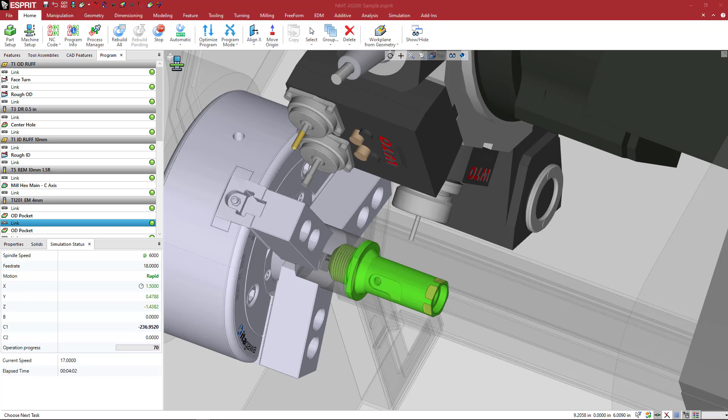ESPRIT's digital twin is a game changer to feed optimized programs to your machine. In this tutorial, we will show you how to build a lathe chuck body and jaw models to take your programming to the next level, identifying program changes upstream of the machine. So let's get started. The first thing we want to check is whether the solid model is positioned and oriented correctly.

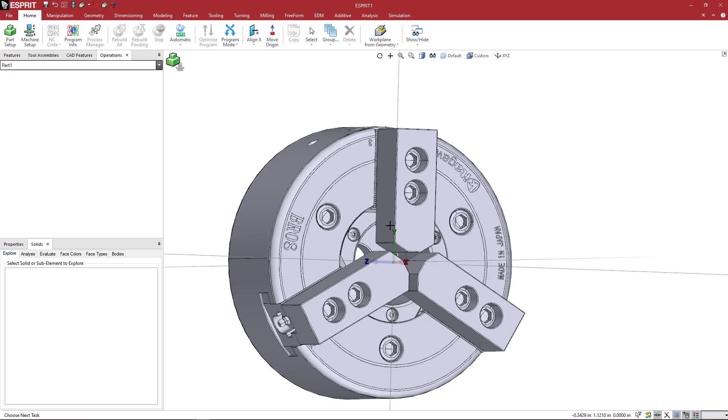This is a Kitagawa chuck, their BR08 that you can download from their website. If you want to follow along, you can go to the Kitagawa website and grab this one. This one is the BR08_OC.

So we first want to orient this. We notice that the face of the chuck is oriented along X. We want that to be along Z. And while I'm doing this, I'm just going to set my 0 point to where this would mount.

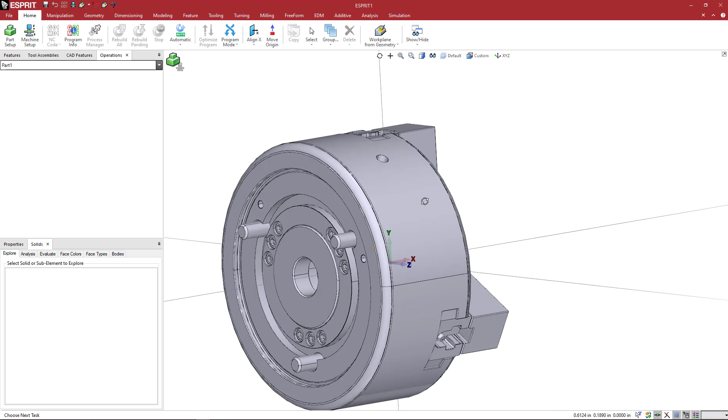So these are the mounting screws. I'm going to pick this back face here, and make sure just to highlight that face. When you start ESPRIT, you can do that, but you can also switch your filter so you can click away here, not on one of these icons, but in the square where it says bodies, and then pick face. That way only faces will be picked, so you don't have to do as much highlight mode stuff.

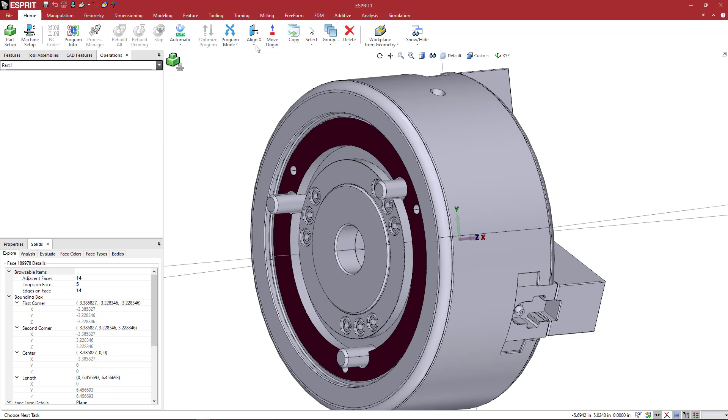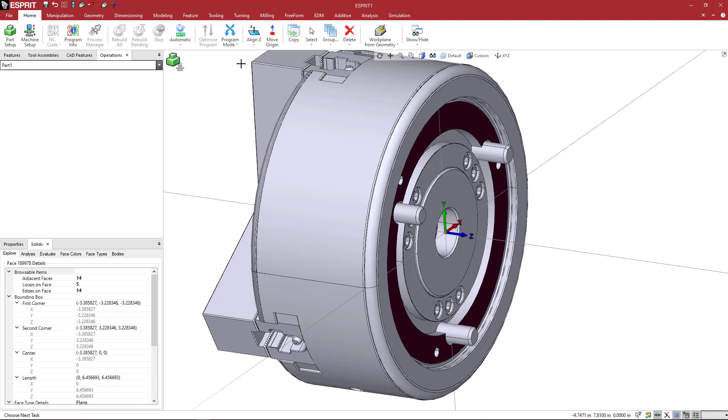So what you could do is pick this mounting face, and what we're going to do here is come to the home ribbon, over to the align commands, and pick align Z. You'll notice that the align Z command will align that face so it's normal to the Z axis, but we want the opposite result. So activate this command while holding the shift key. We're going to hold shift and pick align Z, and we see that the Z axis is now normal, but going in toward the face we selected. That looks pretty good.

So you can basically use that command either way, but we want the Z-axis coming off of the machine, basically into the lathe chuck.

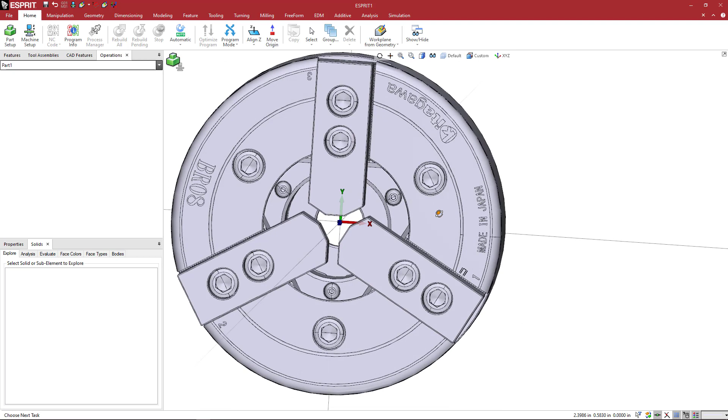So looking at the jaws, in my head I like to have one of the jaws aligned along the X. Looking at this, I'm just going to assume that this is aligned along the Y, so I want to rotate this about the Z-axis here, minus 90 degrees, even with the X-axis.

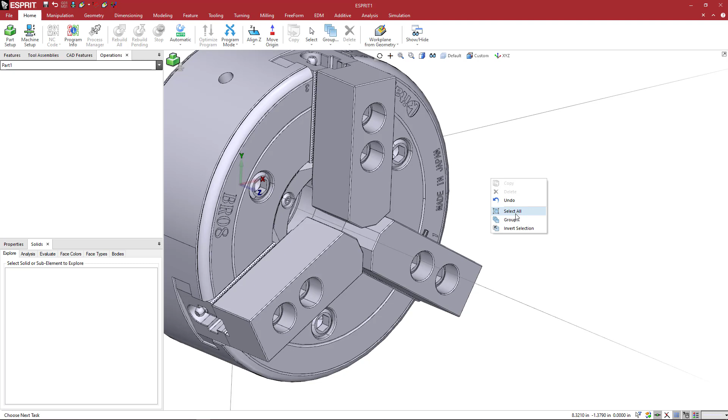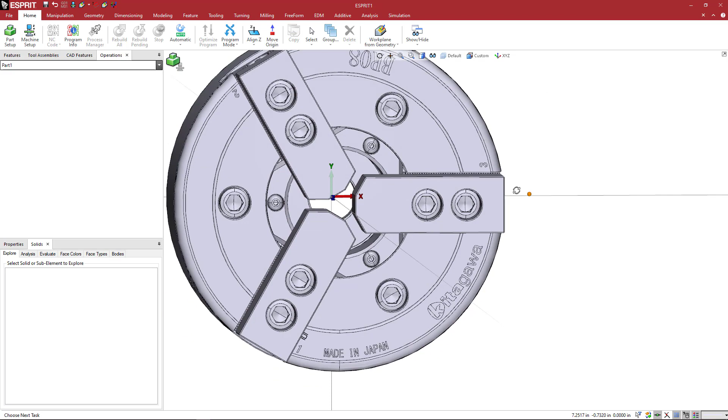So I'm going to hit Control-A on my keyboard, or you can right-click, select all, then right-click again and say copy, and say rotate. We're going to say move minus 90, and using the origin is fine. Once you hit enter, the solid assembly for the chuck will rotate, and you should have this jaw even with the X-axis.

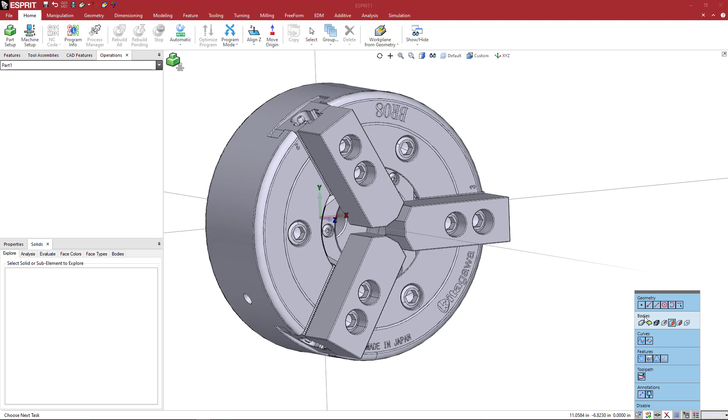So now let's take a look at the solid itself. Now that we've oriented and positioned everything the way we want, I need to turn my selection filter off, so I'll just turn on the bodies. Now I can pick faces or bodies, and I see we've got some individual solids here, which is good. We want to have these jaws separate. I've seen some where they're all in one, so you have to do some CAD work.

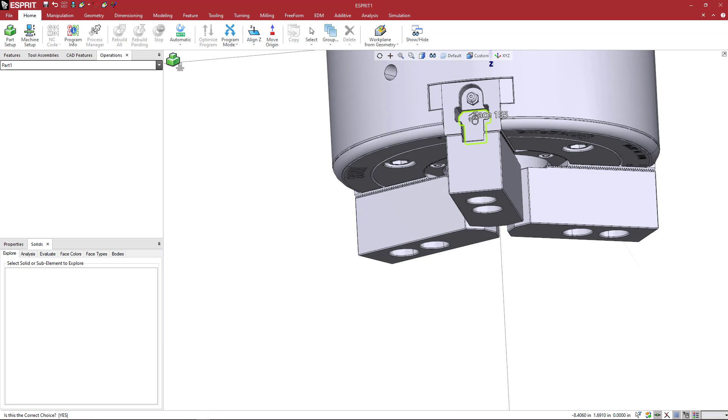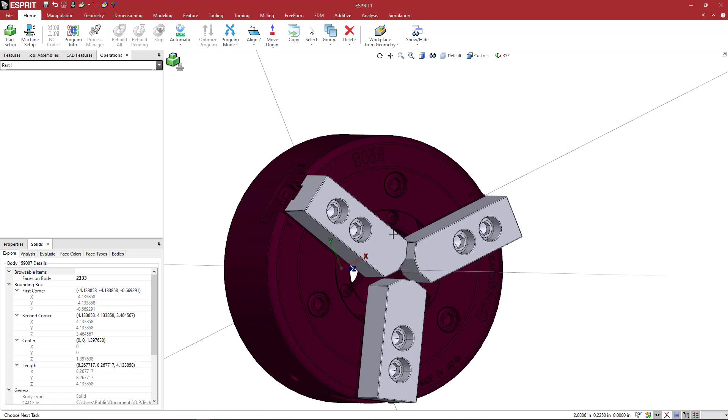So we see that the screws and all the stuff for the jaw assembly is separate, which is good. And then the chuck body looks like everything is in one piece. This is a BR08, and per their website, it's got a center bore which allows bar stock to slide through. I can see they have this component that bolts onto the back, so we're going to want to do a little bit of CAD work with this.

So, okay, what do we want to do next? What I'm going to do here is go to F4, which gives me the view that is the lathe view. And I'm going to create a new layer called jaws, or jaw, whatever.

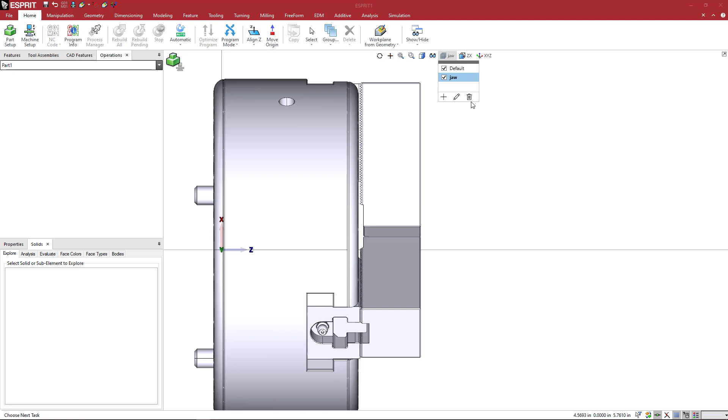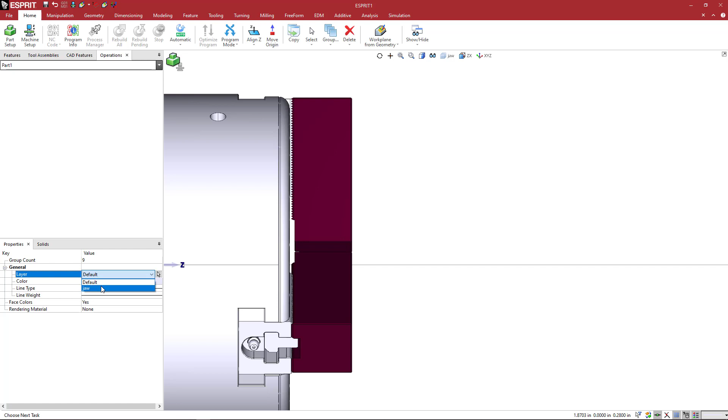So what I want to do now is turn off... I'm going to go back to the F4 view here, and window in on these front jaws, then come to the properties and turn this to the jaw layer. When I do that, we turn this off, and we now have these three base units for the jaw assembly here, in addition to the chuck body that's visible. These I don't really need anymore, so I'm just going to delete them.

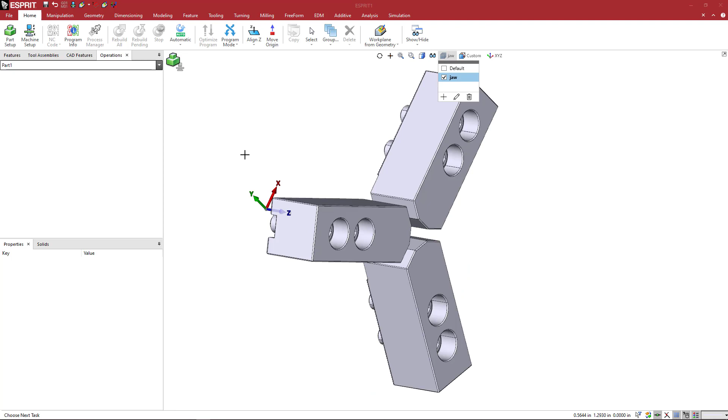Get rid of those two, and we don't need any of this stuff either, because basically we're going to make a jaw assembly that will automatically be loaded onto the chuck jaw.

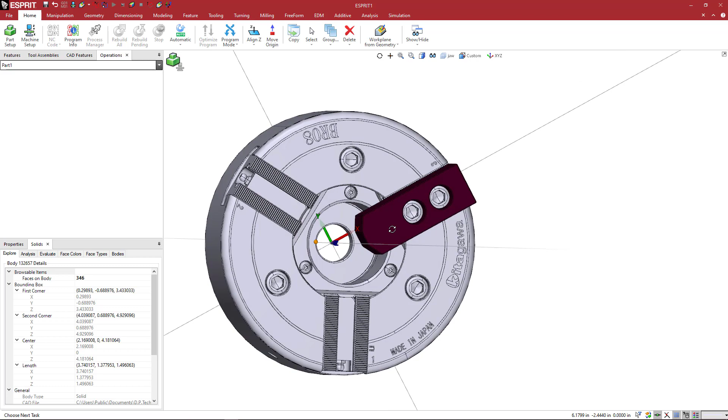One other consideration is going to be the positioning of the jaw itself. We want this jaw to be in the open position. When I look in the manual for this chuck body, they say that this T-slot nut here should not protrude in operation beyond this face here.

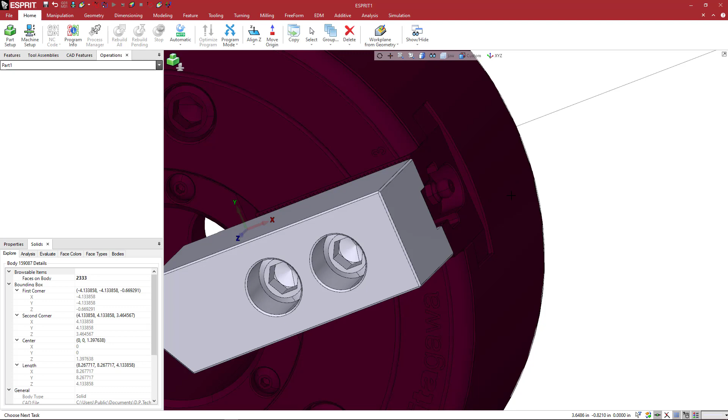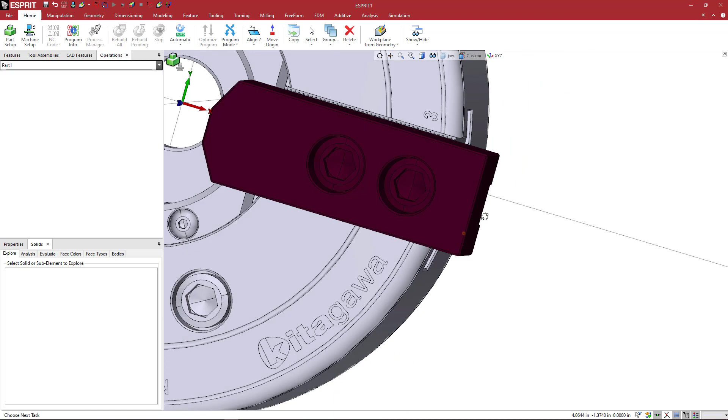So what we're going to do is just highlight this chuck body and hit Control W on the keyboard. Remember, this is already aligned along X. I could just right-click, copy, translate, and along X, I'm just going to say 0.6. That moves this jaw assembly so that it's slightly beyond, which, when you have material in here in the ESPRIT simulation, the jaws are just going to automatically close up to the diameter of your workpiece.

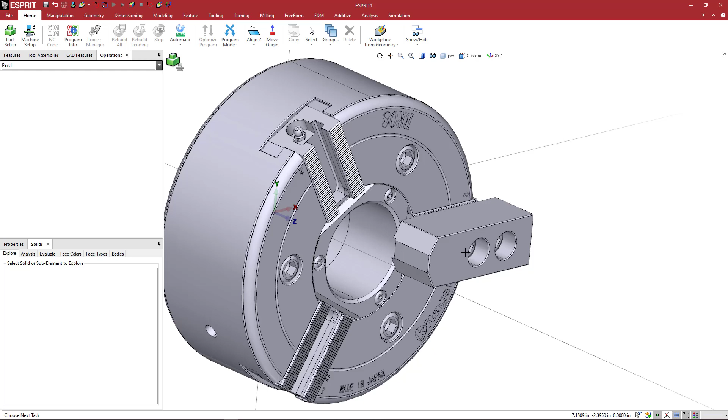Once we've positioned that, then we're good to go. I always like to put things a little bit further than the normal range. Now, ESPRIT will, if you have a workpiece that can't be positioned in your existing jaw because there's not enough stroke or something, it will let you know. So it's up to you on how accurate you want to place that. But let's go ahead and continue.

Let's do a couple things first. I'm going to turn my jaw layer off again, and we'll go back to activate. Double click on default, make sure default is active. What I want to do here is get rid of this center portion so that if we had bar stock sliding through, we don't have any chance for a collision in the ESPRIT simulation.

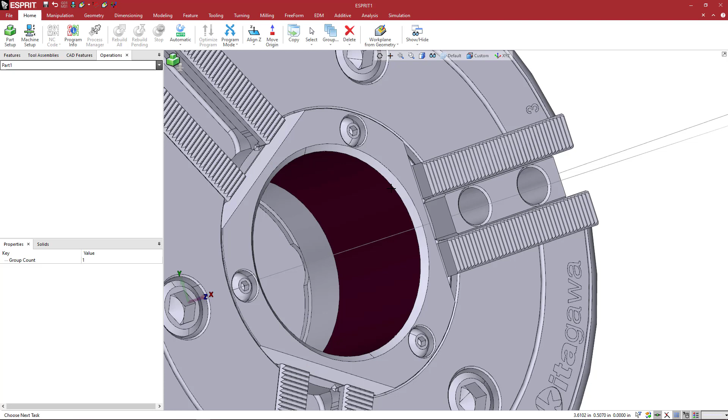So what I'm going to do here is pick this. I'm going to go down here to select filter, and I'm just going to basically click on the box and enable everything. So I'm going to pick this edge, and I'm going to right click and say copy, and we're going to say smash, and make sure your wireframe is checked.

Then what I want to do with this arc is I'm going to come up here to geometry, keep, and I'm going to hold my shift key down. You want to hold shift down, and that is going to basically unbound your arc into a full circle.

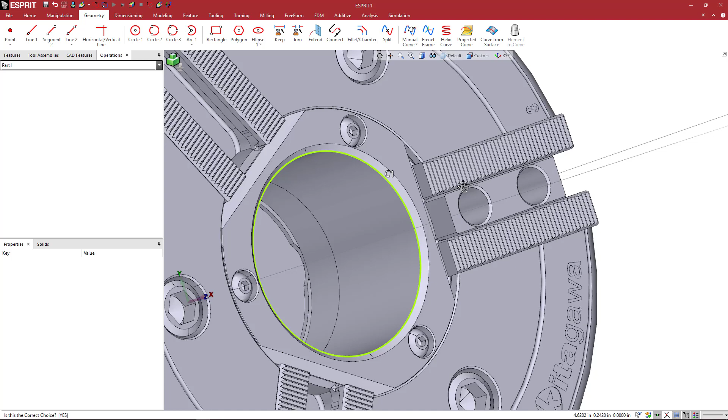Once I've done that, you could go ahead and hit the escape key, get out of that command, and then pick your circle. If you're still active in one of these modes, it shouldn't affect geometry, but if you're not able to pick your circle, just make sure that you don't have any geometry filters selected.

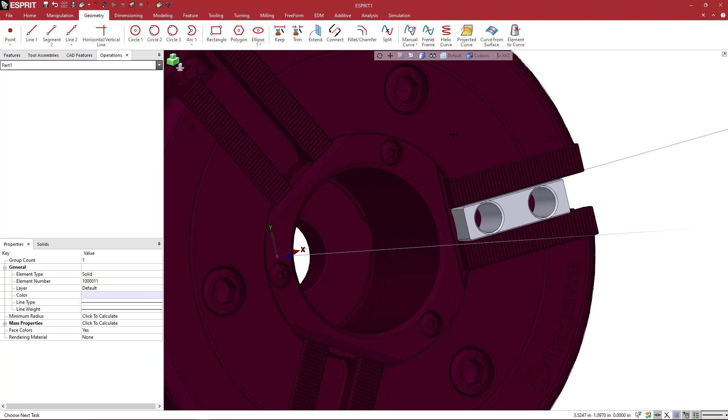So what we're going to do here now is pick this solid. We want to see right here, it said on mine, it says solid model number 11. So 11, we want to remember that.

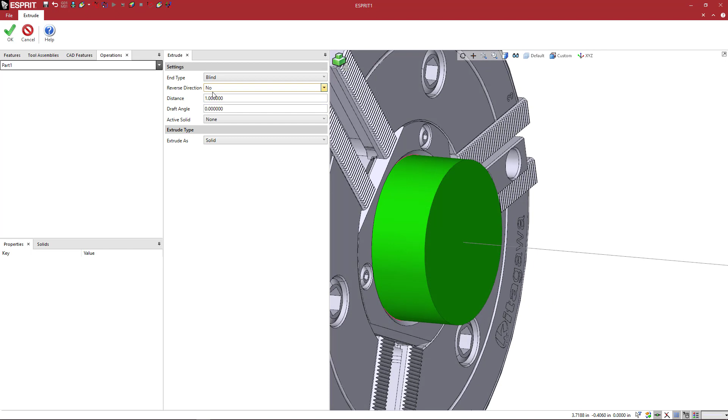So I'm going to pick this circle, and I'm going to come to modeling and go to extrude. We're going to go the opposite direction, inward, and I'm just going to make this a big old number like 5. We can see it goes through the whole thing. I'm going to say the active solid is body 11, and here I'm going to say cut set to yes. I'm going to say OK.

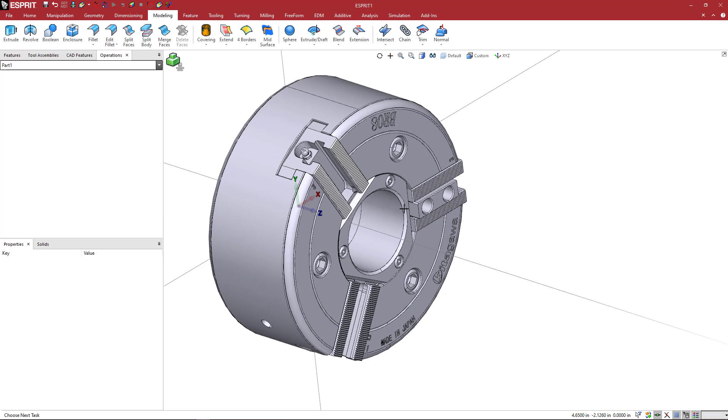And if I look down the center now, there's no obstructions for the bar. So that's going in and out, no problem. Shouldn't have any collisions when I'm executing machining on the machine, doing a bar pull or something like that. So, okay, what else do we want to do?

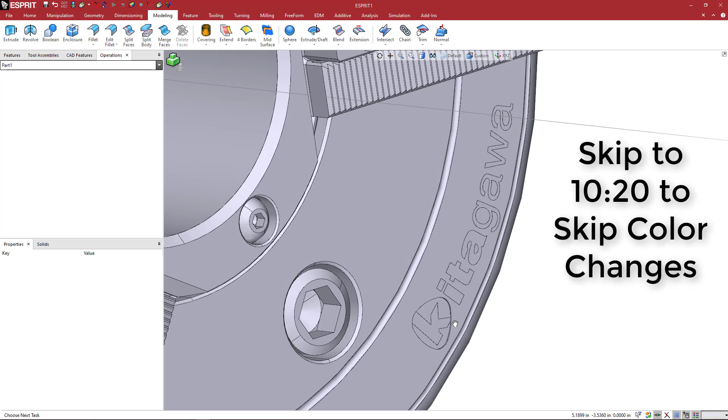Me personally, I'm going to do some coloring right here. If you want to skip this and you don't care, you can skip ahead. But at this point, I'm going to change a few faces. So I'm going to come down here, and just to make the highlight mode a little bit easier, I'm going to pick those two, go to color, come to attribute, and pick blue. I'm going to pick the K, right click, go to color, go to attribute, pick white.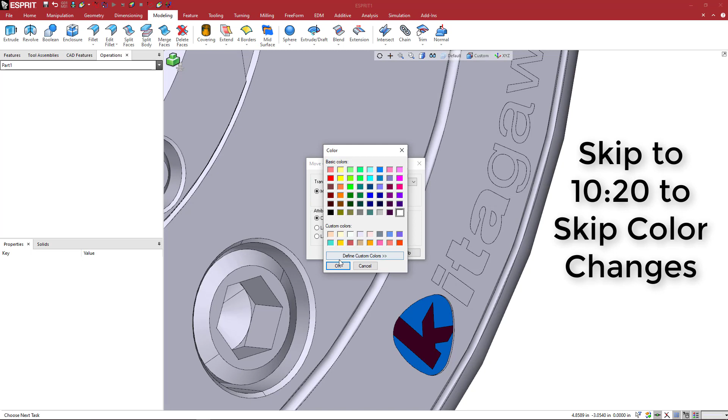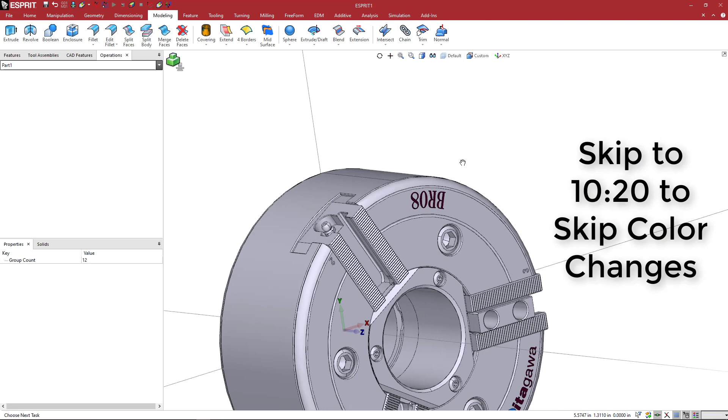And then I want to pick all these little faces that define the Kitagawa logo for the word, and I'm going to grab these here at the top for the BR08. Make sure that you're holding control the entire time that you do this so that you're adding to the group. You can add any face or remove any face from a group by holding control. Right click, color, I'm going to say black.

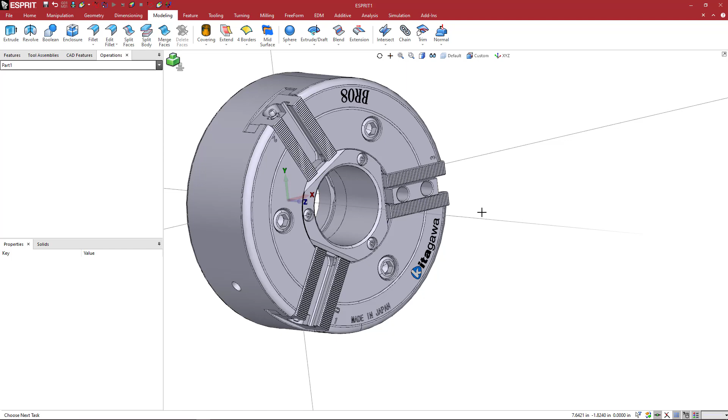And just to make it look a little bit nicer. So at this point now we want to define our jaws. So we have this base unit, and the reason that I have this is I want to use that to define my jaw axis. So these are going to move, and I need to define a position where the jaw is located and where it will be loaded.

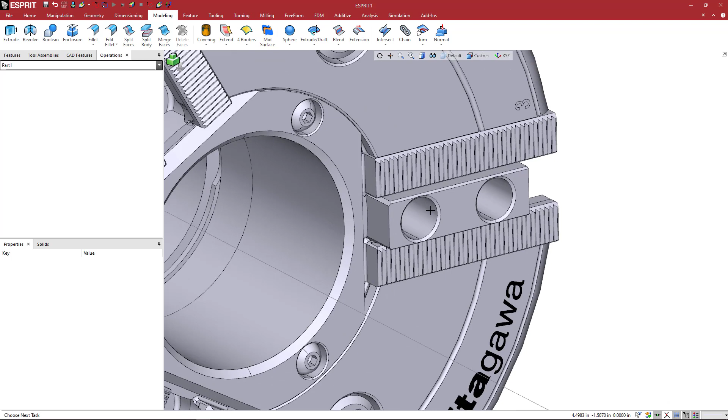So I want it to appear on top of this base unit, okay? And I want the whole jaw assembly to appear in this slot so that it's gonna move along the x-axis, because if you recall, we made this even with the x-axis, and fit on my bar diameter. So right here, what I'm gonna do is maybe pick the center of the chamfer bore here as my location point. So this is already oriented along x in the direction of the axis as it slides along the x.

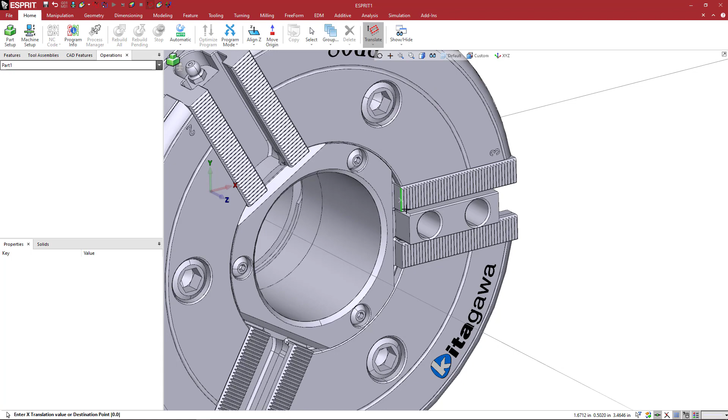So I'm going to come here to the home, and I'm going to go to translate work plane. I'm going to activate the command, and then I'm going to rotate a little bit sideways here so we can see. Make sure that you pick this outer one, not the inner one. I guess it doesn't really matter, you could pick this point or the center. You could do whatever you want, but I'm going to pick this and come here to make a new work plane and call this JA_1. Okay, so this is a jaw adapter number 1, basically.

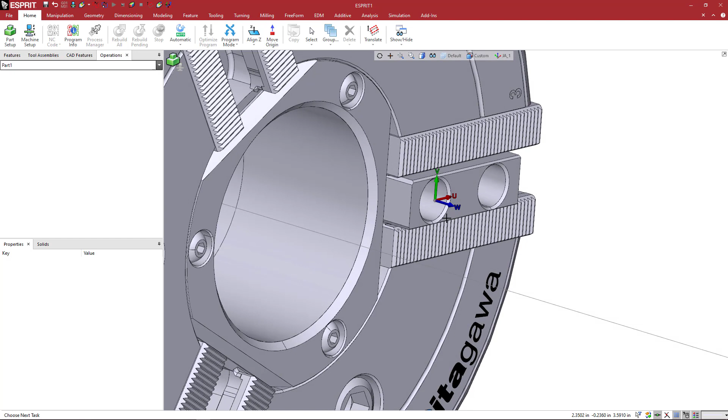JA_1. Really quick too, I want to get this dimension from the center here to my z-axis. It'll be clear a little bit later why. I'm going to just go ahead and pick this dimension here, and now I have this segment that gives me this length, which is 2.109.

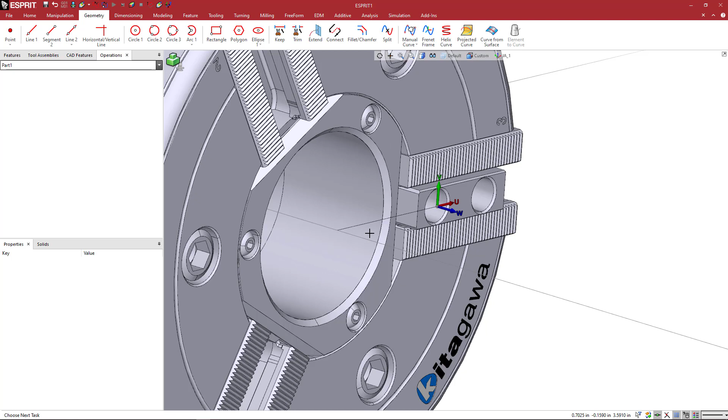So now what I want to do is take this jaw axis and duplicate that at 120 and 240 degrees. So to do this, we can go back to the home, come over here to the rotate command. So we want to rotate our work plane, and down here at the left it says select a line of rotation, and we're going to pick our z-axis, and then it says what's the angle of rotation. We're going to put in 120 and hit enter. And now we see that that work plane is located at the next jaw, and you can see that the u-axis, or the local x-axis, is parallel to that slot.

So we're going to come here and just do a JA_2. And then we're going to do this again. And here you could just hit enter 3 times. Line of rotation LZ 120, and it moves it to this next position. And I'm going to say add another one, _3, and now we have JA1, JA2, and JA3 to define all 3 jaw adapters.

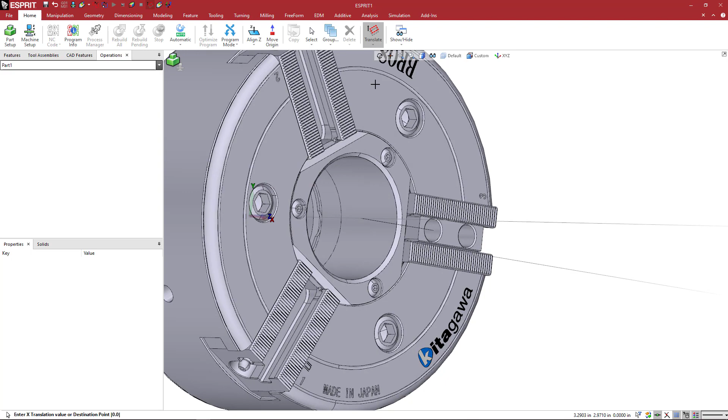Now, what I want to do is define, in case maybe I want to load an intermediate fixture on this chuck. So I'm going to do that. Let's go ahead and pick that. Let's go back to the XYZ first. So I'm going to do that, and then I'm going to come to the center of the face. So I'm going to come back to translate, activate, and then kind of coming to the side here. We want to pick that center point.

You can see this is the one that defines the face. So as I move my mouse, make sure that you pick that center point there. I guess you could always move this stuff in the ESPRIT interface when you're setting up your simulation anyway, so it's not a huge deal if you pick the wrong one. But let's make this an FA_1, which is a fixture adapter _1.

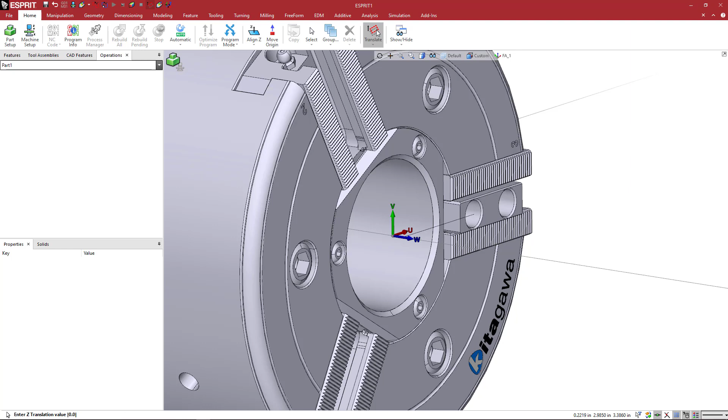And we're going to do this translate one more time. And I'm going to do 0, 0, and say 5 inches. And I'm going to basically define this as a workpiece adapter. So I'm going to do another work plane. This is WA_1. So a workpiece adapter is going to allow me to put my part in the simulation, and it will be positioned at that point.

So why so far in front of the face of the chuck? Well, typically most people set their part at a G54 at the face, and then the part extends backward. So what would happen if you placed it here is your whole part would be here, then I'd have to move it forward and then maybe move it back. So this gives me a little bit of room that if the part is shorter than 5 inches, I could probably do an alignment mating on that, no problem, without having to move it once.

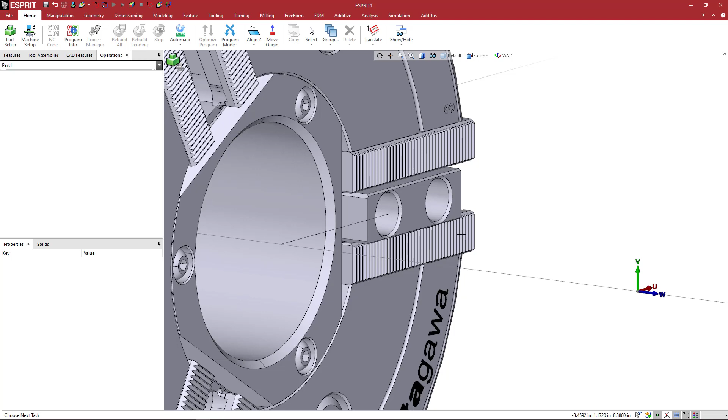So here we go, we're going to make the jaws. So before we do anything at this point, I'm going to take this and put this on the jaw. So I'm going to come here and highlight this solid model here, okay? So we're going to make sure that that solid is highlighted, and I'm going to come here and place this on the jaw layer, all right?

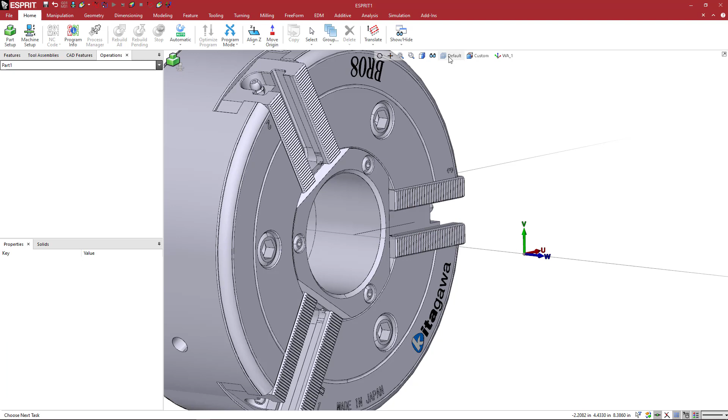So once we do that, if you have it visible, it won't disappear. I had mine turned off. So we basically have created the GDML for the chuck body, and we're going to go ahead and save this out. So if this is your first one, you might want to save the ESPRIT file.

So you might want to come here and go File, Save As, and I'm going to come here to my fixtures, Kitagawa, and I'm just going to say File, save this as BR08_OC. And that way I save my work, and if I made a mistake, I don't have to go and do all those things again.

But now what I'm going to do is highlight the chuck body. The geometry doesn't matter. It's not going to be saved as part of the GDML, but this is my fixture body for the chuck. So I don't want to have any jaw stuff highlighted with it. So when you highlight something and save a GDML, it's only going to save what you have highlighted.

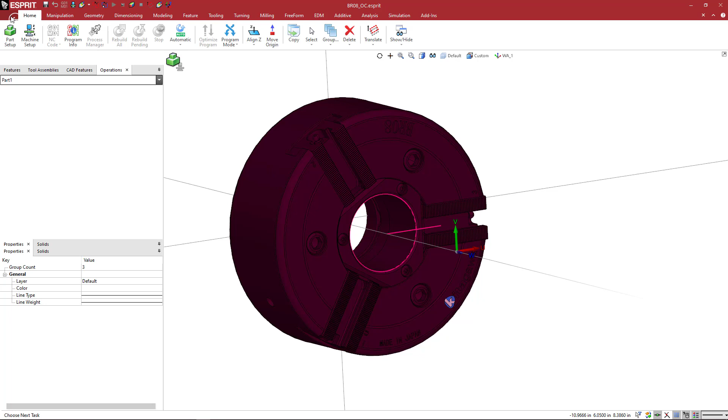So we want to take this particular component and come here and say File, Save As, and we're going to say Fixture File. And here I've already made it, so we'll just resave this. And we've saved the chuck body.

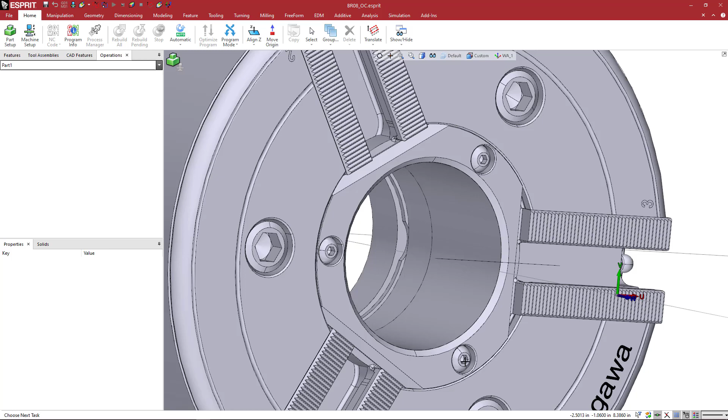Now, just really quick here, I'm not super familiar with these chucks, so I'm not sure if this bore should include this or this should be removed as well. So, depending on what the real component looks like, it's likely that this interior area here with these 3 screws might need to be modeled away also, I don't know.

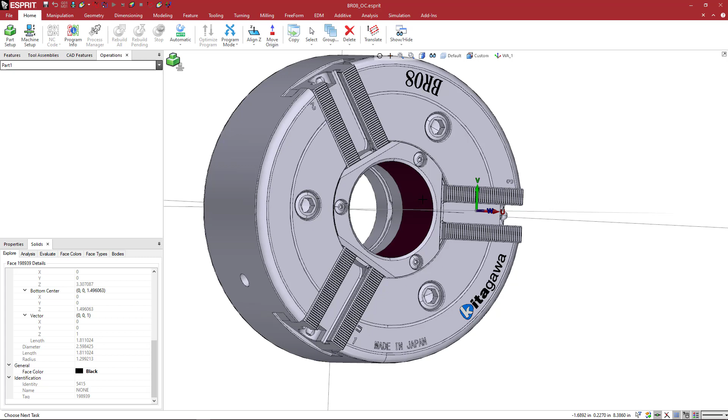But anyway, we can pick this here and look at the solids tab, and this is going to tell us that this is a 2.6 inch diameter bore, so like a 2.5 diameter bar can fit through here. So maybe that's correct. Okay, so now we want to do the jaws.

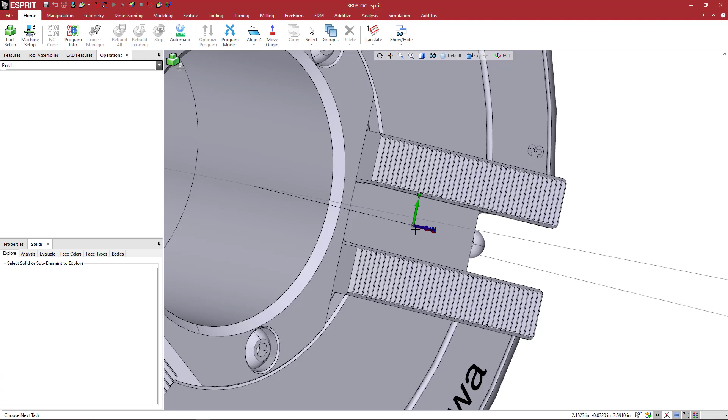So we want to come back to JA1, and this is going to be where we want the jaw to appear. So naturally, this is going to be the point that we want to define the jaw at x, y, z, 0. Okay, so we've saved out the file, we've saved out the GDML.

What I'm going to do here is basically delete this. I don't need that anymore. I don't need this either. I'm just going to delete that. I'm going to come to jaw, turn that back on. Okay, and this 0 point at JA is where I want my XYZ 0. So the easiest way to do this is to just do a move origin to this point. Okay, so we're at JA1, so we can see where this is at.

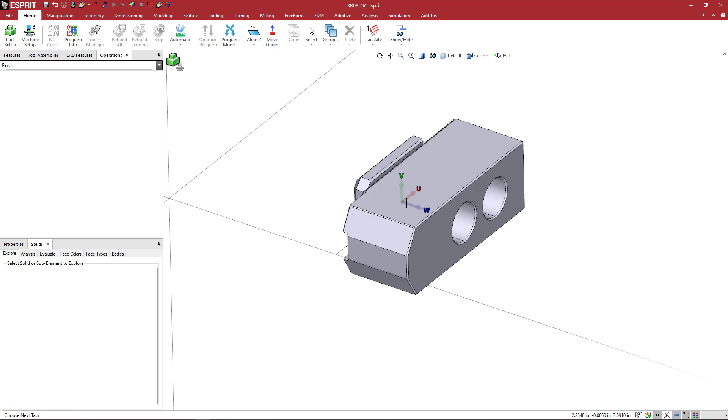So I'm going to come here to a clear view because we're picking inside all this, and going to clear makes it more visible. I can more easily see my highlight mode. So what we want to do now is move our origin point to this point, and that will snap our jaw to that position.

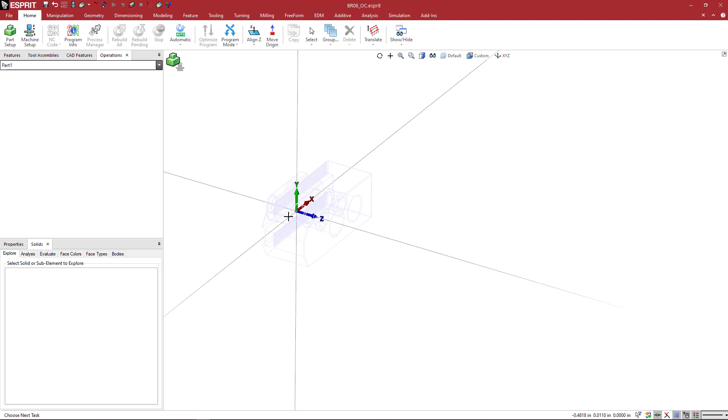So now what I'm going to do here is just get rid of all this. I'm just going to highlight each one and hit the delete key, and we're basically left with our default G17, G18, G19 planes, or XY, ZX, YZ. And looking at this, by moving the origin point, it just basically snapped the 0 point to where we want.

All right, so we have this segment here, and the reason I wanted this segment is because the end of this segment defines where the turning center axis of the machine is.

So at this point, I have an ESPRIT file that I'm going to come here and go File, Save As, and I'm going to call this BR08OC jaw, which I saved already. Just going to save over that. So I'm saving the jaw file separately.

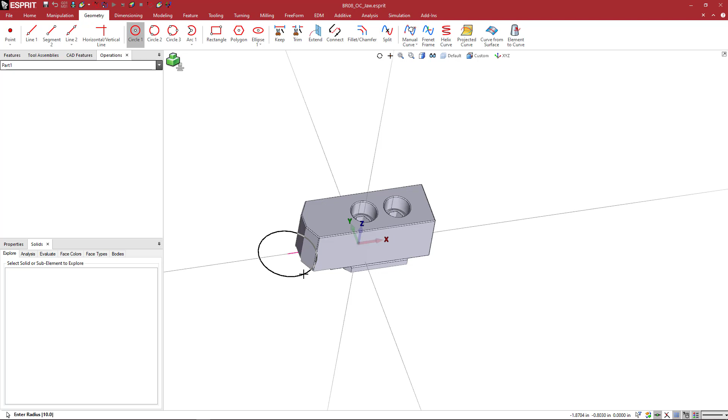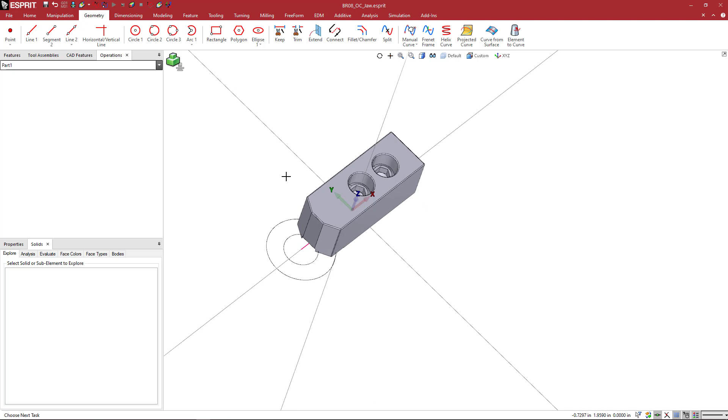So now, if you want to cut down this jaw, you could come in here and say, oh, I'm gonna have a 1 inch workpiece. So we can pick whatever we want to do, radius of 0.5 or radius of 1 for a 2 inch diameter workpiece, and then you can extrude and cut away, so we can save out multiple jaws. I don't have to wonder where that center point is anymore.

But basically, we've positioned our jaw, and there's really nothing else that we need to do at this point. We're just going to come over here and say File, Save As, come over here to Jaw File, and we want to make a BR08OC jaw, and I already did this. I'll just File, Save over that.

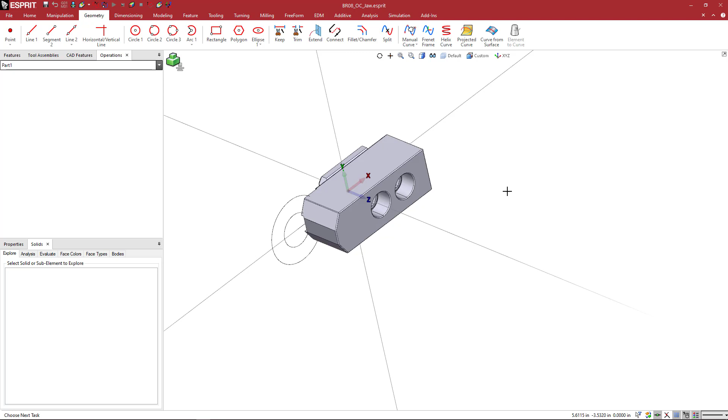And now we have our chuck body and our jaw, and we're ready to use them in an ESPRIT simulation for a part that you want to do, and we'll look at the part setup here.

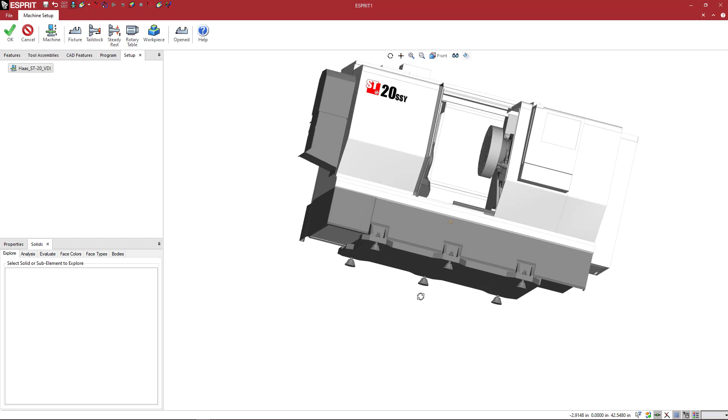I just whipped this together. Under the stock, we have an outside diameter of 1 inch, let's say, on something that we're going to machine. We would come to the machine setup, and let's just load in a Haas machine, and we see the machine here. So we'll zoom in, and basically we want to load a fixture first.

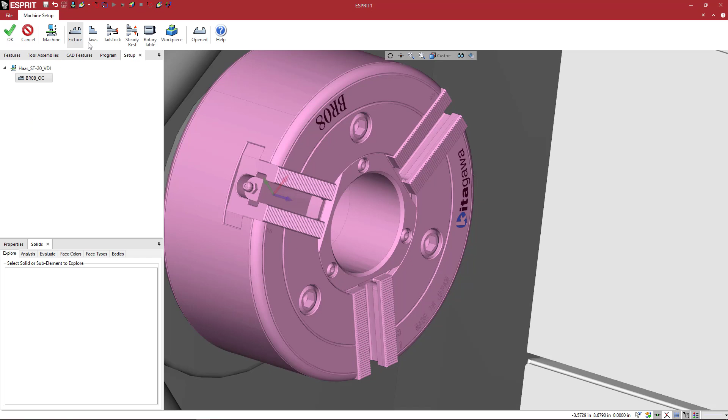So we want to first bring in that chuck body that we created. So we're going to go to the Kitagawa here and BR08. There we go. And we see that is brought in. And now we're going to come to jaws. So this is highlighted. We're going to come to jaws, and we're going to grab the basic jaw that we made, which was the one that was supplied with the solid from the website. So we can see here that that functions no problem.

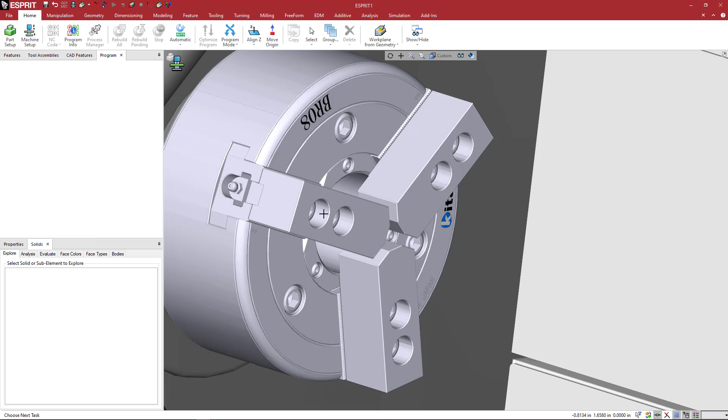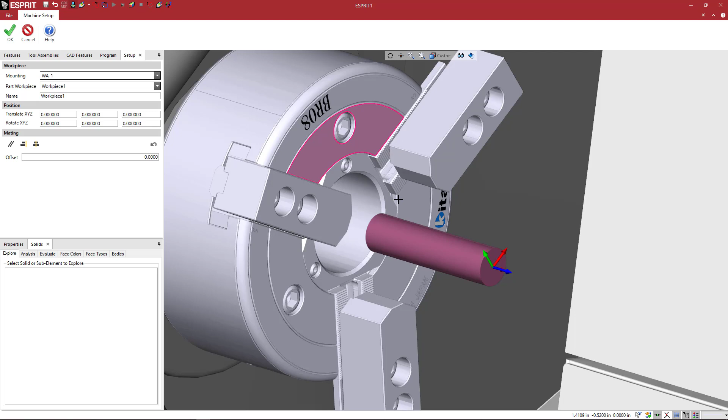So under machine setup, on the chuck body itself, since we created that WA position, WA workpiece adapter _1, we can have the workpiece added to this as well. So let's go ahead and do that. And depending on what you want to do, you can pick, let's say, the face of the chuck and the face of the back side of the stock.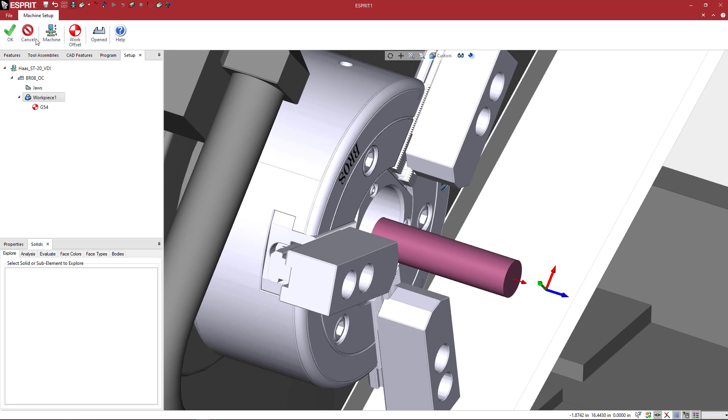Holding the control key, you want to pick the two so that they're both highlighted, and then do the alignment mating, and it will snap the part back up against the chuck body. So you can see that is there. Let's bring this so we can see the part.

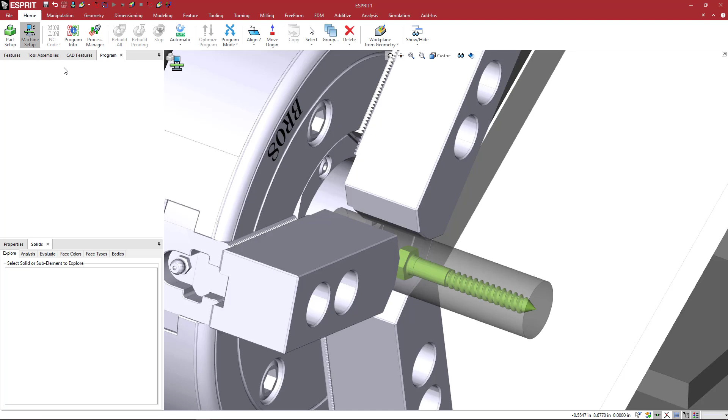Now, what I was talking about before with the jaw stuff is you can do that cut extrude. So I went ahead and did that with several different circle diameters so that we can see what that looks like. So here we want to come to the machine setup and double click on the jaws, and we'll change the jaw. So this is a 1-inch diameter, I believe. I already forgot, but we're going to pick the 1-inch diameter, and I'm going to say OK. And you'll see that the chuck jaw solids have changed.

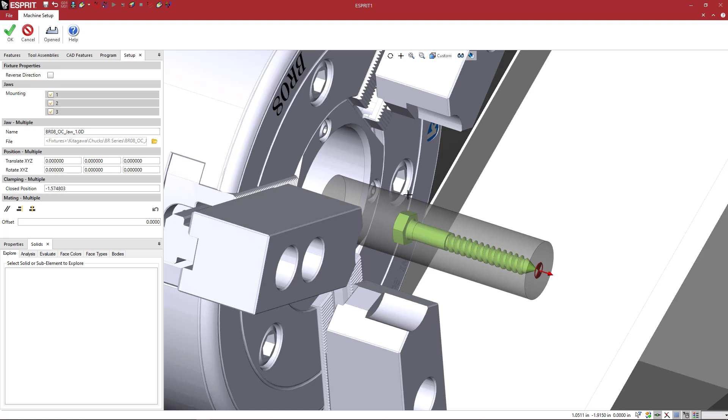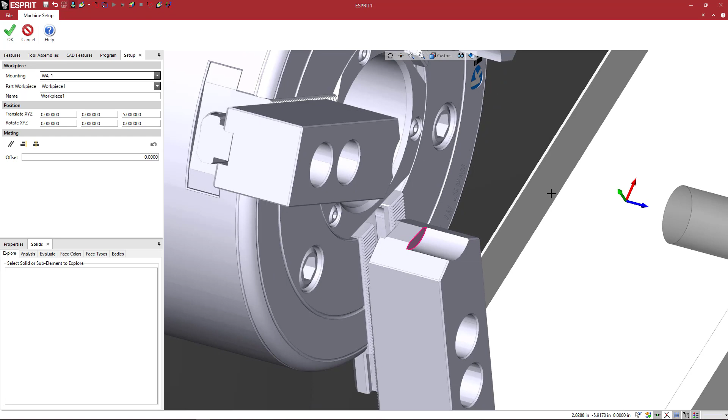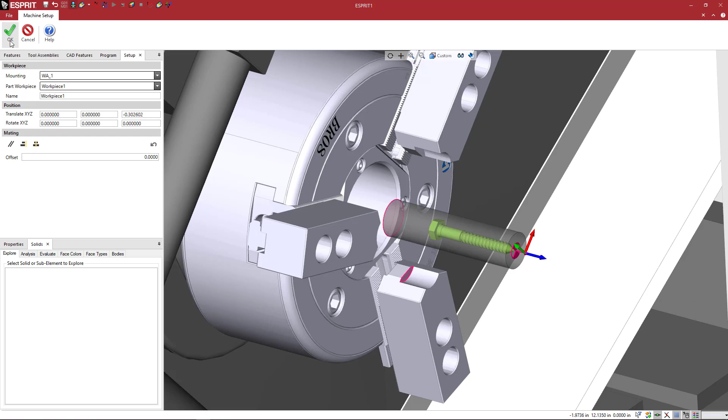So now what I'm going to do is say OK, and on the workpiece side, I'm going to kick this back out. So this is what I meant, is originally you would have to do this. If I had just done this the first time, my workpiece would already be out here. I'm going to pick one of these faces here, and then holding the control key, we're gonna zoom out and rotate, and I'm going to zoom in and pick that back face. So with the control key, I have this face and this face selected, and then I can come here to snap that to that back face, and now you can see, beautiful.

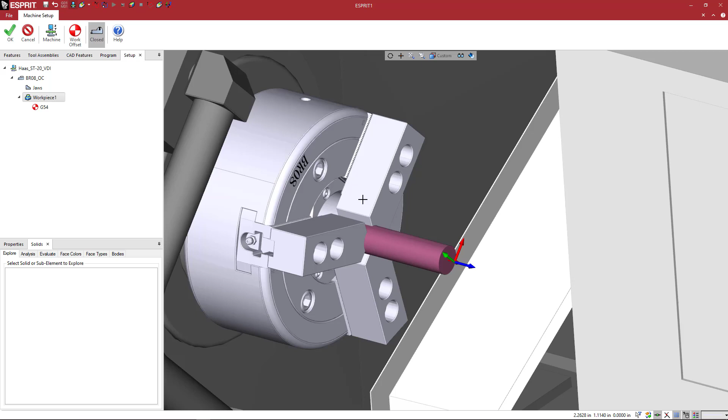The 1-inch diameter bar stock fits right on the 1-inch turned jaws. So if you have some soft jaws, or I just used the jaw solid that was provided with the Kitagawa, the serrated jaw here. But if you were using a different jaw or whatever, you just want to make sure that that's positioned correctly, and now you could use that in the simulation.

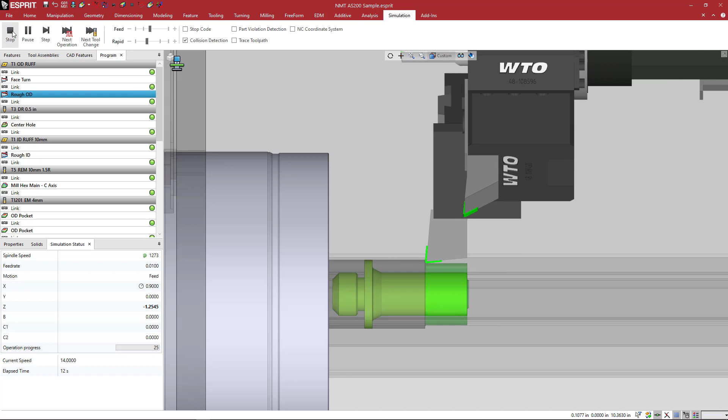So as an example here, I brought in a part, and we're just going to bring this in and start the simulation, and we can see that the part, everything is working fine. We're going to scroll down here to the OD milling, and when I start the simulation, we see our tool come in, and you can see here that with the clamping unit and the holder, the live milling holder, we are very close to that chuck jaw.

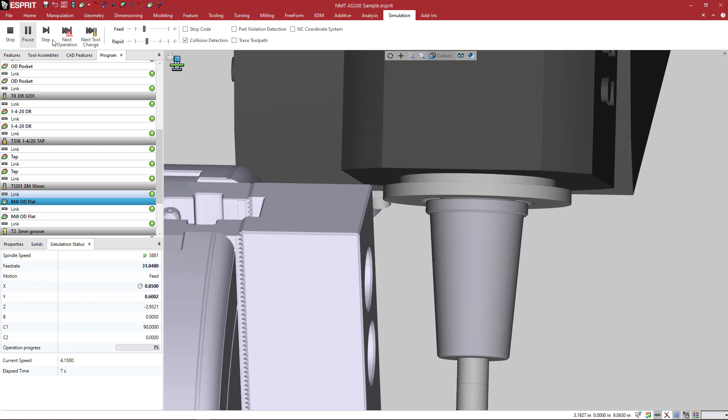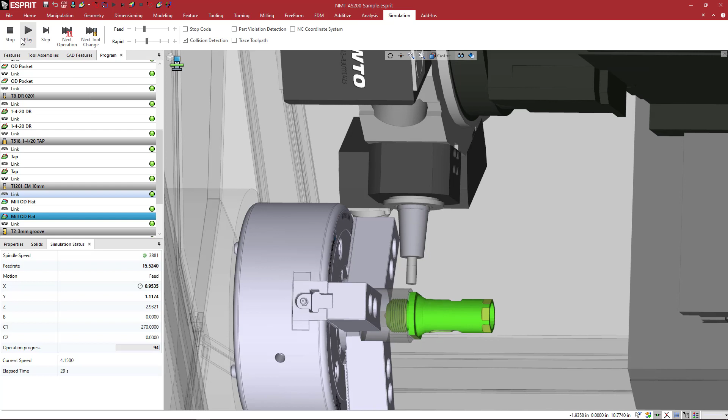So we want to make sure that we don't have any issues at the machine, because once this program is created and sent to the machine and we discover that issue at the machine, we're going to have editing and everything is going to be delayed. The machine will be sitting and waiting for the program. And additionally, now we can see all these links are green, which means that they're collision free.

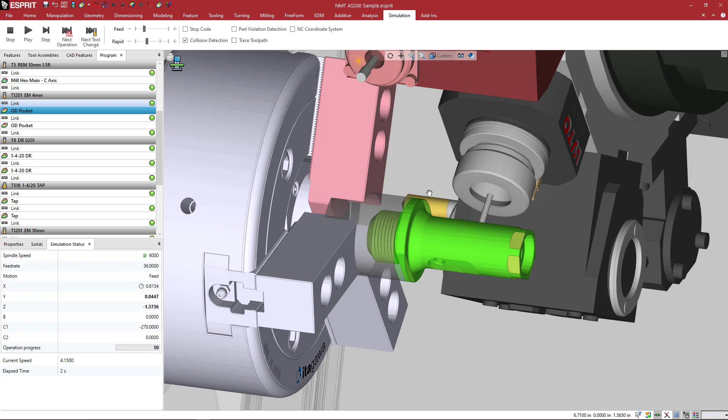But even though this is checking that holder, we might have another issue. So here we see this tool is coming down to mill this OD area, but you can see the positioning of our chuck jaw is causing a collision between this clamping unit here, this live holder, and our chuck jaw.

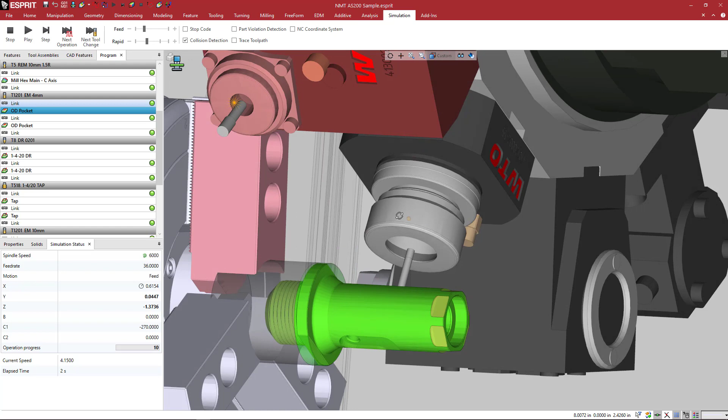So even though we're using this tool here, I know that I need a longer tool so that this is not in the way, or maybe I need to change the configuration of my turret to move this holder somewhere else so that this one is not in this position when I'm doing this milling. So again, having this accurate digital twin upstream of the machine allows me to send a more confident, more proven program to the machine tool. So hopefully the new digital twin capabilities in ESPRIT will allow you guys to make more parts.